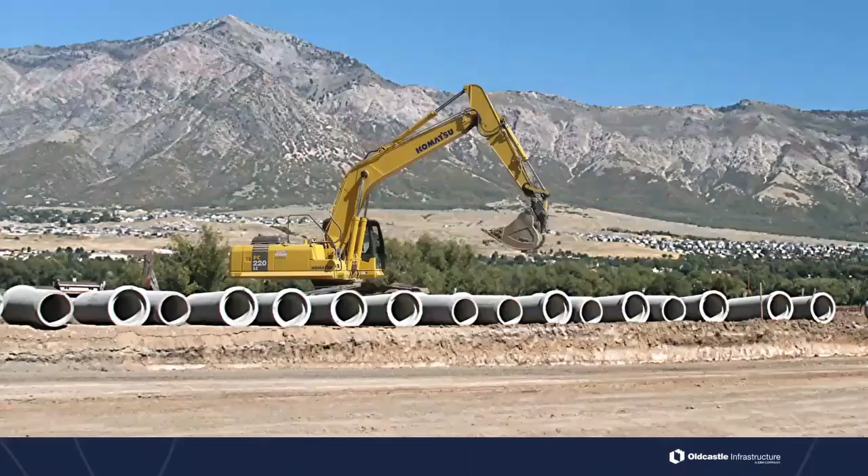Some of you may not be familiar with Oldcastle, so I'm going to quickly share some of the solutions Oldcastle Infrastructure can provide. I currently live in Utah, spending a majority of my time providing technical resources to design engineers, contractors, and inspectors in the Mountain West area. Most people know us by our precast products, mainly reinforced concrete pipe and precast box culverts, and we also provide precast manholes and catch basins.

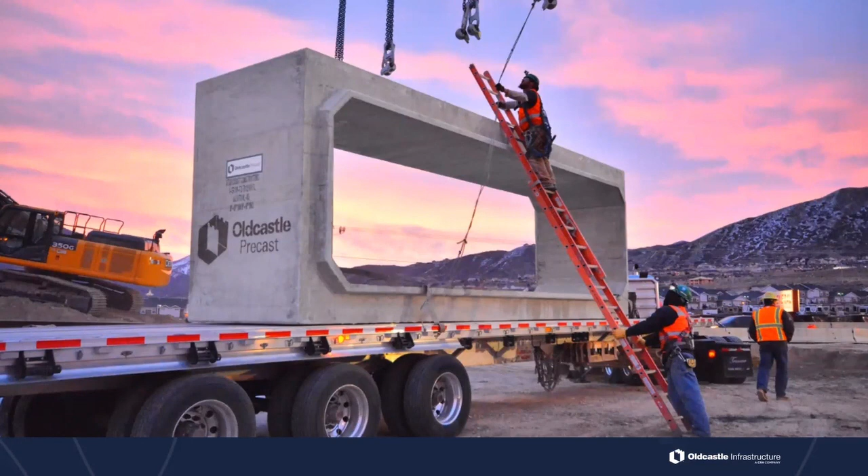This has been our main focus for many years, but recently we have added some really cool new product lines that can help meet your needs. Oldcastle recently acquired Torrent Resources, a company out of California, and the industry leader in drywell manufacturing and installation.

We've also expanded our stormwater solutions to include StormCapture, a total stormwater management system that uses precast sections for underground detention storage. This system uses the strength of reinforced concrete to provide more volume for storage, which drastically reduces the footprint compared to other underground detention systems you may have seen on the market.

We have also included some really cool stormwater treatment system options like sediment traps and hydrodynamic separators that could fit your specific low impact development needs and your stormwater treatment requirements.

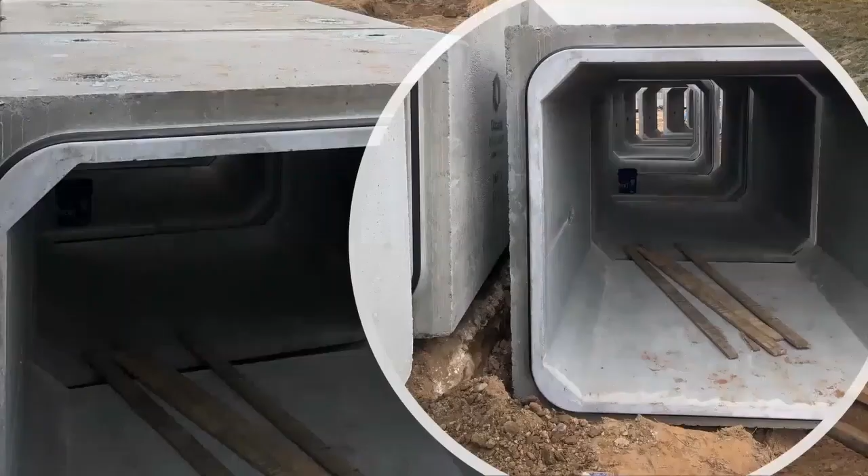Our newest addition in the Utah market is gasketed box culvert. Instead of your typical soil tight or silt tight mastic joints, we now have the ability to manufacture gasketed box culverts to provide a watertight or leak resistant joint without any additional joint treatment, which saves time and money on installation. A very cool new product that I suggest you look at.

In a previous webinar, we discussed the basics of post-installation inspection, or PII. Today we're going to dive a little bit deeper into that with inspection and evaluation of reinforced concrete pipe after installation. So let's jump right in.

Concrete cracks, fact. One of the questions I get asked most by inspectors and municipal engineers is what cracks are acceptable? They'd say, Jason, we know that concrete cracks, we understand that, but how big of a crack is okay? What can we tell this contractor is okay and what needs to be fixed?

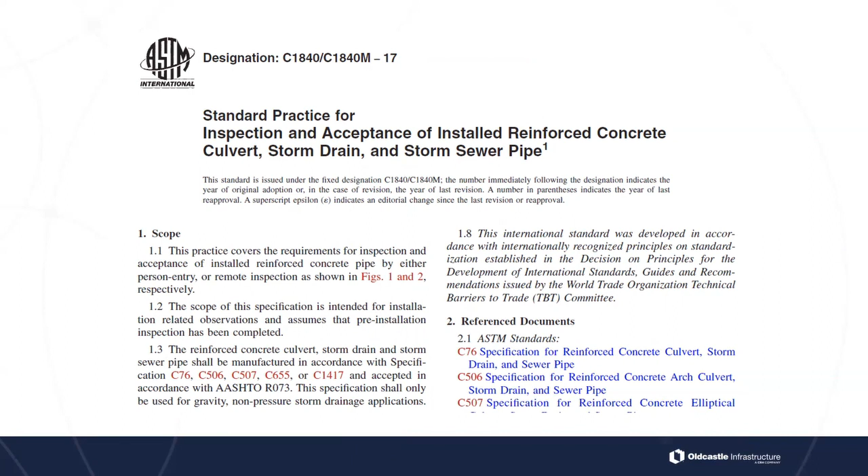About 7 years ago, I was invited to sit on a committee that wrote a national ASTM specification called C1840 that covered the guidelines for the inspection and evaluation of RCP after it was already installed. This specification was adopted in late 2017, and it has become an absolute game changer in the reinforced concrete pipe industry. After decades of relying on guidelines and recommendations from industry professionals like myself, we finally had a codified specification with objective and measurable criteria for the acceptance or rejection of reinforced concrete pipe.

So the sections of ASTM C1840 are as follows. Section 1 goes over the scope of the spec. Section 2 goes over all the reference documents, whether ASTM specs or AASHTO, different guidelines there. Section 3 is all about the terminology and the definitions. Section 4 talks about significance and use for the spec. Section 5 talks about pipe inspection equipment and the procedures. Section 6, equipment and operator accuracy verification.

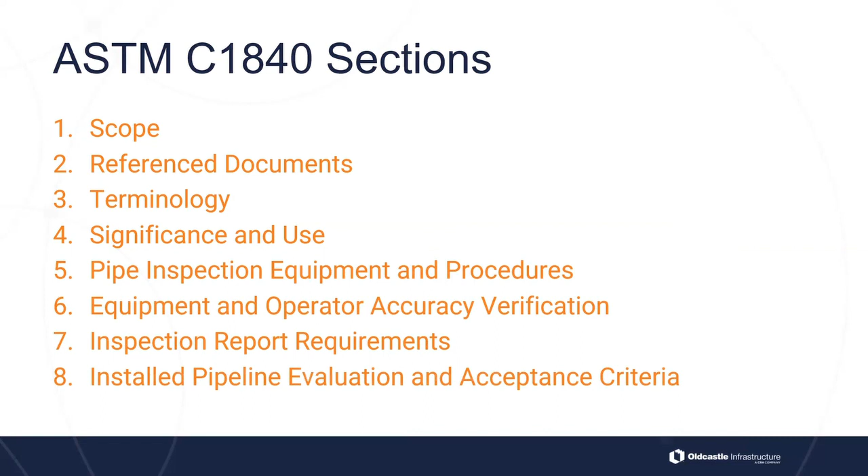Section 7 discusses the requirements for inspection reports. And Section 8, which is the one that most people focus on here, and kind of the whole crux of this spec, is the installed pipeline evaluation and acceptance criteria.

The second, and the most commonly used method in our market, is remote inspection camera or remote controlled CCTV inspection. This is used in small diameter pipes, because about 99% of the pipe that I get to inspect is too small to walk through. This is what I see more than anything.

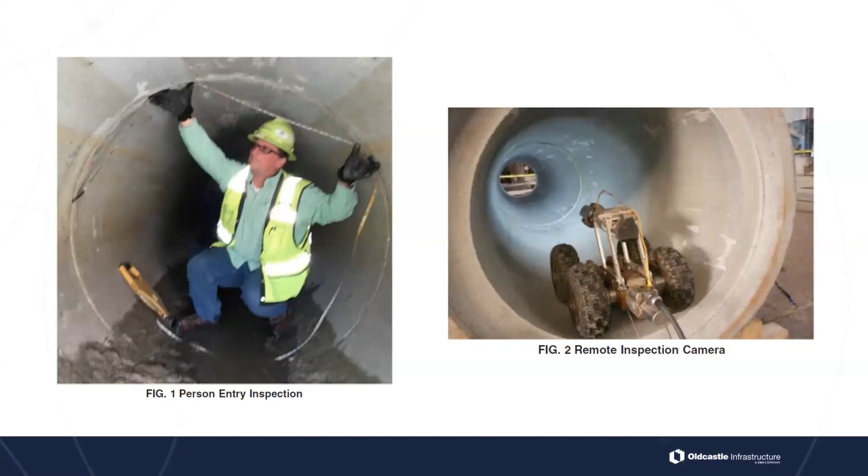So I get asked a lot, what should we be looking for in these inspections? When hiring a professional to do your video inspections of the pipe, I would suggest that you find someone that is NASSCO PACP certified. So what is the NASSCO PACP certification?

Well, I am so glad that you asked. I thought you'd never ask that question. I've been dying to tell you, so let's get into it here.

NASSCO is the National Association of Sewer Service Companies. NASSCO's mission is to set industry standards for the assessment, maintenance, and rehabilitation of underground infrastructure and to assure the continued acceptance and growth of trenchless technologies. NASSCO's vision is to increase awareness of aging underground infrastructure and provide viable solutions through education, technical resources, and industry advocacy.

NASSCO offers three separate certification programs: PACP, LACP, and MACP. PACP stands for Pipeline Assessment Certification Program, LACP stands for Lateral Assessment Certification Program, and MACP, yep, you guessed it, Manhole Assessment Certification Program.

These are the trusted sources for proper and consistent assessment condition coding of pipelines, laterals, and manholes. The goal of these programs is to help pipeline system owners create comprehensive databases to properly identify, plan, prioritize, manage, and renovate their assets based on condition evaluation.

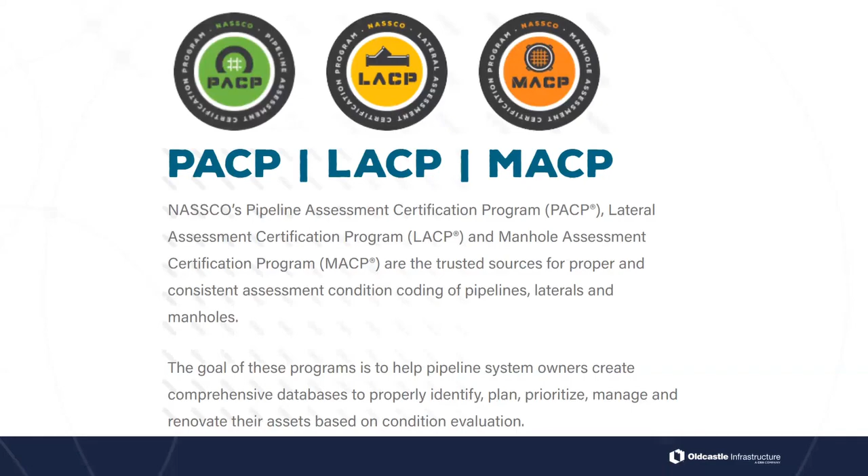So in order to better understand the inspection videos I was watching in my job, about 5 years ago I decided to sign up for a class and get my PACP certification. Interesting side note, it was in Las Vegas in August, so yeah, it was pretty miserable. It was like 120 degrees, but that's neither here nor there.

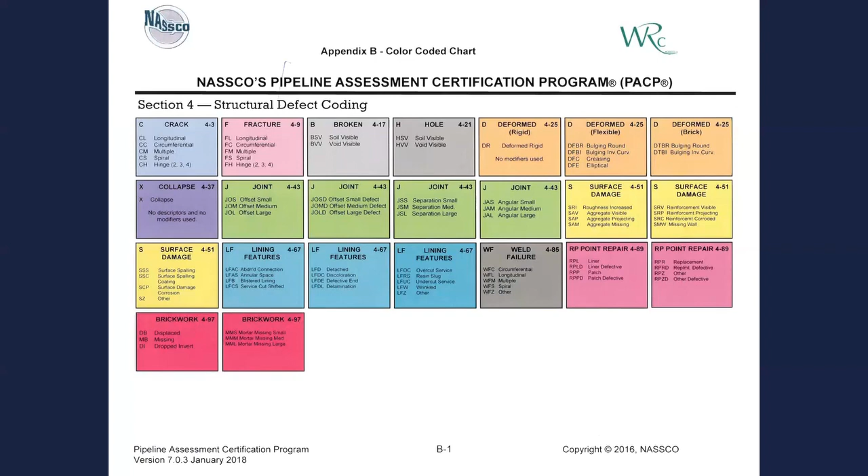Section 5 deals with codes for operation and maintenance issues, including deposits of sand and other debris. There's a whole section just for identifying roots within a pipeline. There's also the section on infiltration, obstacles and obstructions, and my personal favorite, vermin.

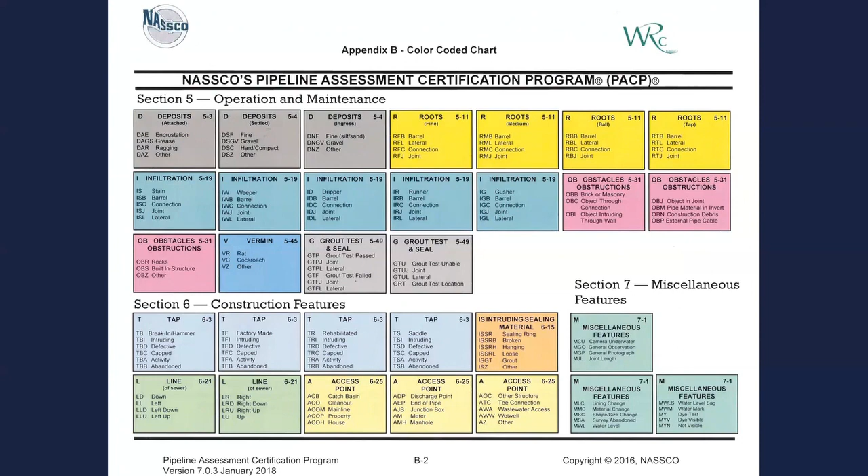Interestingly enough, I should point out that vermin, if you look, there's that blue box with the V, vermin. There's really only 3 options for coding vermin, which I thought was kind of interesting: rat, cockroach, or other. I'm not 100% sure why this intrigues me so much and why I'm so fascinated by the fact that the only vermin you can code are rat, cockroach, or other. But I don't know, it just is interesting to me.

Okay, so let's go back to section 4, like we talked about. Remember, that's about structural defects. So let's look at the 4 most common issues found in an inspection of RCP.

So the first blue box there is for a crack. The C in the top left-hand corner shows the initial code for a crack, so if you find a crack, we know it's going to be a C. The numbers in the top right-hand corner are the page number for easy reference in the manual if you have any questions or need examples of different types of cracks.

So each of those pages in that manual, there's just page after page of examples, right? It's really helpful to say, okay, what does this one look like? You can compare and contrast and find which one looks like what you're seeing, so that you can ensure you're coding it correctly.

Now, as you've done this a lot of times, and as you go through and identify these, they start becoming second nature on how you code them and identify them. So it gets easier over time, but at the beginning, you're referring back to that manual a lot. It's good that they provide a lot of visuals and detailed pictures and images, and it's all in full color, so it helps you really see what you're looking at.

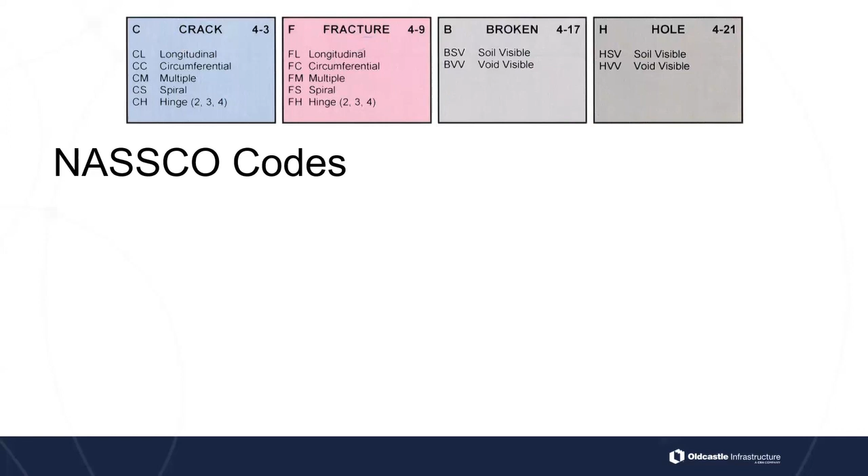So once we've identified it as a crack, there are 5 additional options to get a little bit more specific in the coding. For a crack, you've got CL for a longitudinal crack, CC for a circumferential crack, CM for multiple cracks, CS for a spiral crack, and CH for a hinge crack.

Similarly, fractures have the same 5 options for additional coding. And then you've got a broken pipe, which has the option of BSV, broken soil visible, or BVV, broken void visible. And a hole has the same options as a broken piece of pipe.

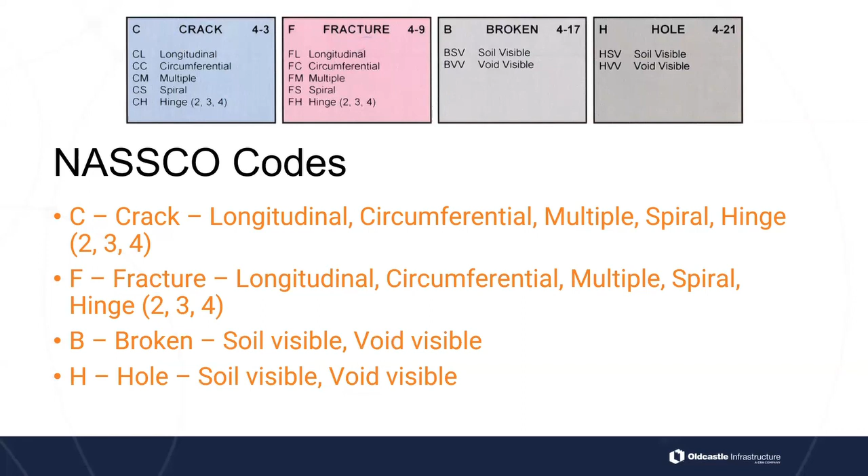Before we go any further, I think it would be good to go over the difference between a crack and a fracture as defined by NASSCO, because some people may not really know, and they may be calling cracks fractures and fractures cracks. We want to make sure we're getting those identified correctly.

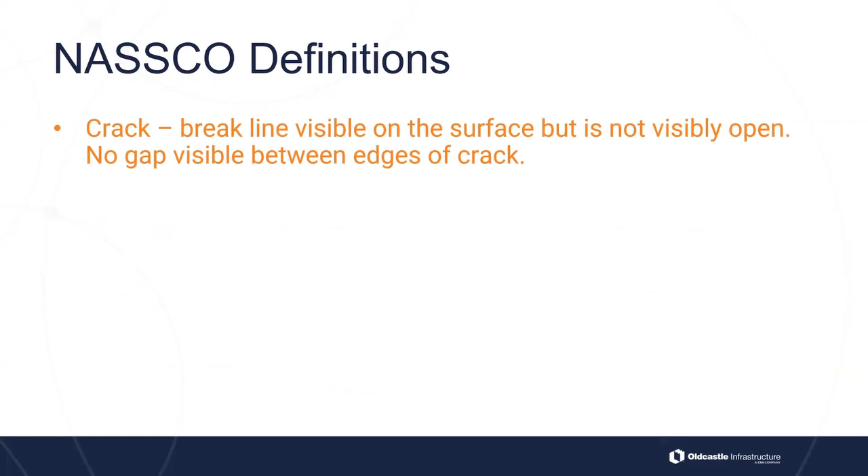So a crack is a break line visible on the surface, but is not visibly open. There's no gap visible between the edges of a crack. Now, a fracture, on the other hand, is a break line that has become visibly open and a gap can be seen. So the pipe wall in this case is still in place and doesn't move, but there is a gap, and the side of the crack can be seen.

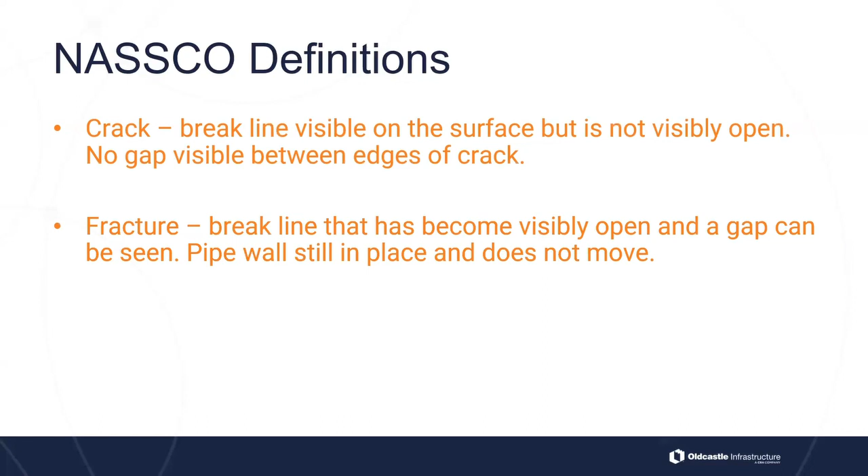Because cracks and fractures are the most common and have the most secondary classifications, we should make sure that we understand exactly what those codes mean.

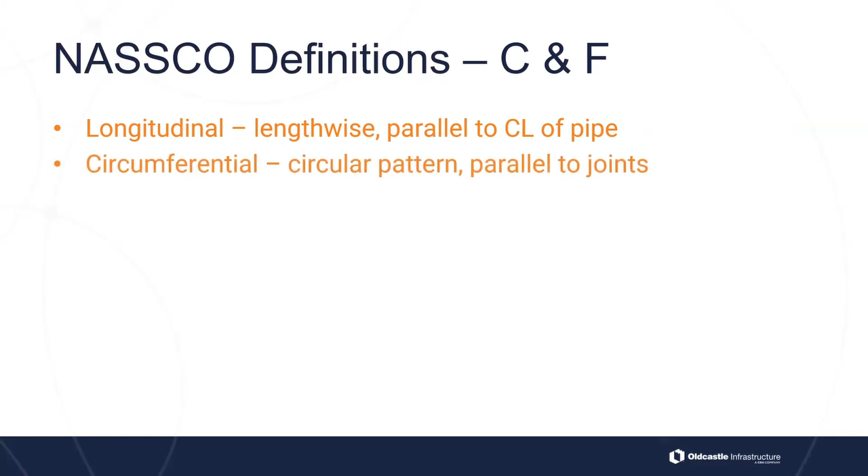So for cracks and fractures, L is longitudinal - this is lengthwise, a crack or fracture that is lengthwise and parallel to the center line of the pipe. Now, C is for circumferential - this is a circular pattern, parallel to the joints, so it goes around the inside of the pipe in a circular pattern.

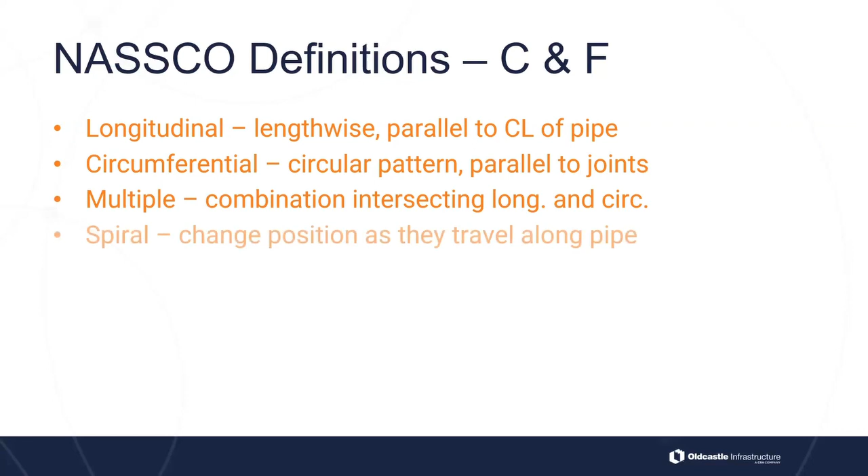M would be for multiple - this is a combination of intersecting longitudinal and circular cracks. So if there's multiple cracks all throughout that pipe section, that's what they would code as multiple. Now, spiral is one that changes position as it travels along the pipe. So if you have one that's going from longitudinal to circumferential, that would be a spiral crack.

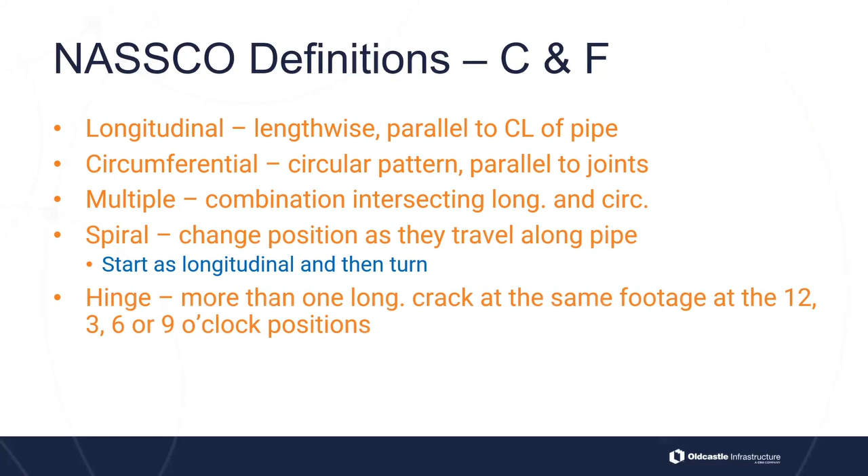A hinge crack is more than one longitudinal crack at the same footage at the 12, 3, 6, or 9 o'clock positions. So that would be - you've got a crack at top and bottom, or at the spring lines, or at all 4. That would be your hinge crack.

So going back to this, now that we know what all of those are for cracks and fractures, you could see CL, CC, CM, CS, CH, FL, FC, FM, FS, FH. For example, if you're reading through an inspection report and you see a CC, you would look at this cheat sheet and say, oh, CC means it's a circumferential crack, right?

And if you were reading through the report and you saw an FL, for example, that wouldn't stand for Florida. That would be a longitudinal fracture, and so on and so forth. So let's take a look at a couple of examples of each of these, and see what we're identifying and identify them correctly.

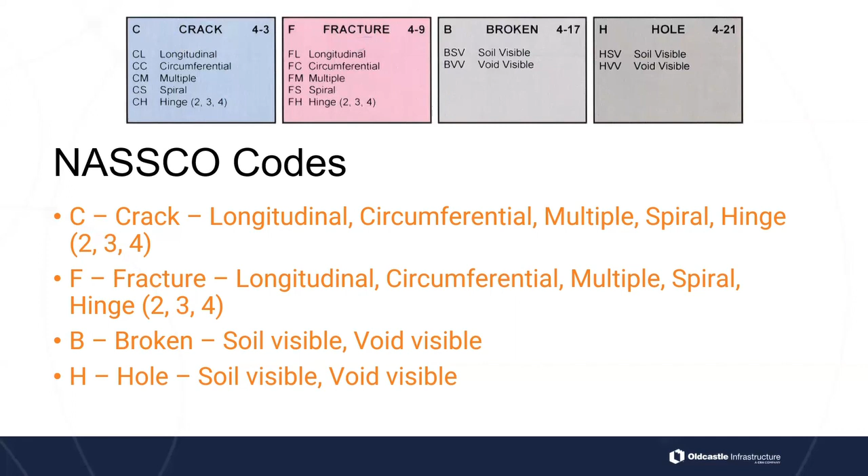Now, this one here, if you look at the top of that picture, this is kind of an interesting one. This is a brick pipe, right out of the NASSCO manual here for PACP. At the top of that pipe, you can see that it's more than a crack. It's an actual fracture. You can see the gap there. So that is a longitudinal fracture, or an FL, fracture longitudinal. That's kind of a cool picture there.

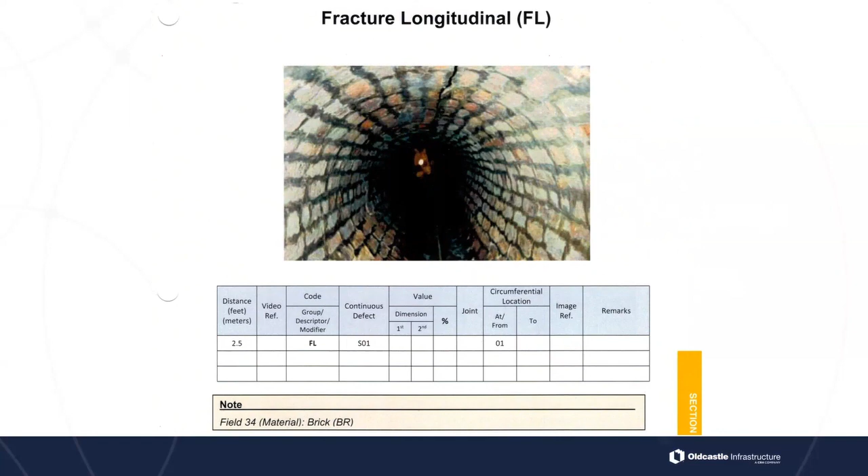This one is also out of the book in section 4 there. This is a fracture spiral. You could see that it's a gap, so we know it's a fracture. It's not just a crack, not just on the surface. We can actually see the gap, so we know it's a fracture. And notice on the right-hand side of that picture, it's coming in as a longitudinal, and then it immediately dives down into a circumferential crack. So that would be coded as a fracture spiral.

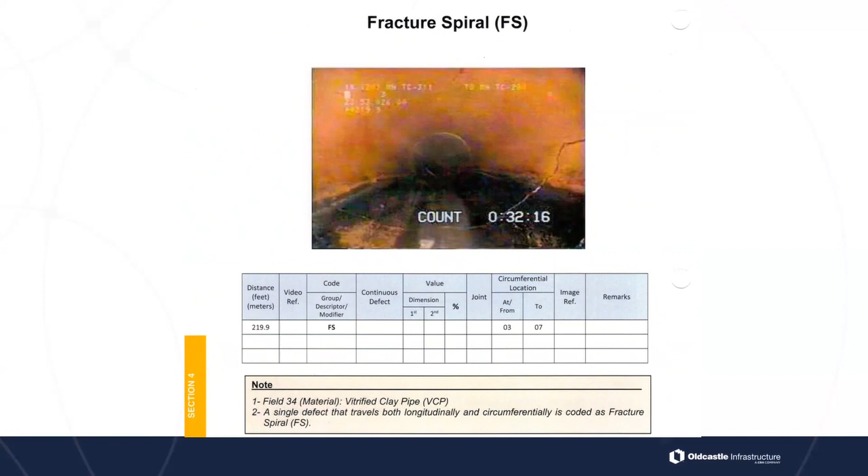And then this one would be not only crack multiple, but hinge crack. So this would be a CH, crack hinge, and then you would also put how many quadrants it's in. In this case, you could see it at the spring lines and at the top. So we've got one at 12 o'clock, one at 3 o'clock, and one at 9 o'clock. Now we can probably assume that there's one at the 6 o'clock position.

However, when we're coding these and going through and inspecting, it's not our job to assume. So we're not going to say that it's in 4 quadrants, we're not going to say CH4, because even though there's water, debris, silt and deposits along the bottom, we can't fully tell that there's a crack. If you cannot see the crack in the bottom of the pipe, don't call it out. It might be there, but it's not for us to make those assumptions. So we would just put CH3, because that's all we can see.

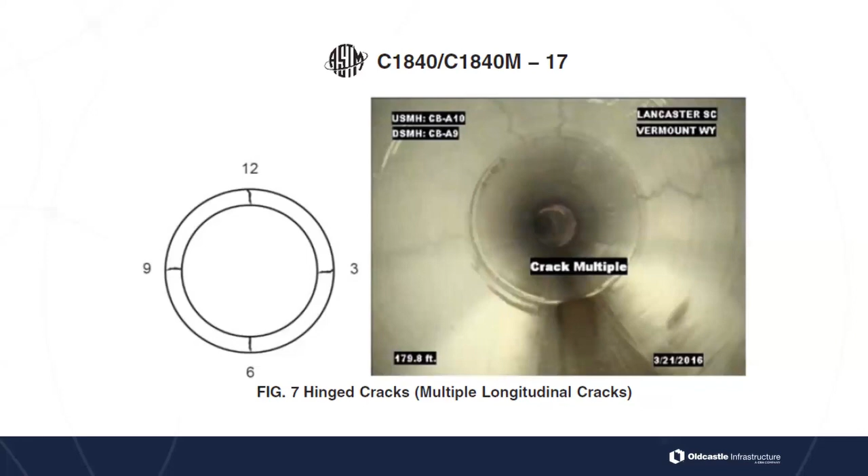All right, so that's for cracks and fractures. Now we're looking at another issue. The other most common issue would be joints, right? So you've got some coding for joints here. You've got 4 different options for joints: offset, defect, separation, and angular.

So with offset, you've got offset small, JOS, joint offset small. You've got JOM, joint offset medium, JOL, joint offset large. So the first picture there, figure 13, shows a joint offset, and they've got that coded as JOM, or joint offset medium. That would be where your joint is actually offset a little bit so that vertically, it is coming into the pipe a little bit there. Okay, so that's your offset.

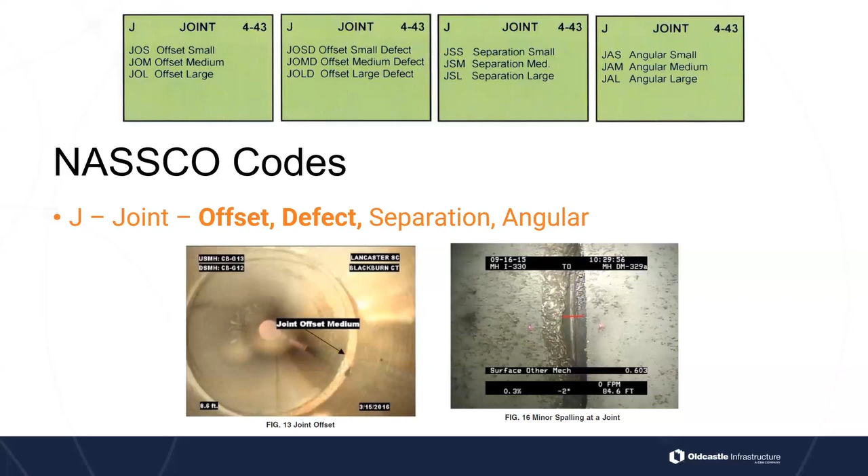The next one would be a defect. For instance, if there's minor spalling at the joint, or something like you could see in figure 16 on the right there, that would be defect. So that one could be JOSD, joint offset small defect, because there's some cracking or some breakage there at the joint, just right as it comes in there.

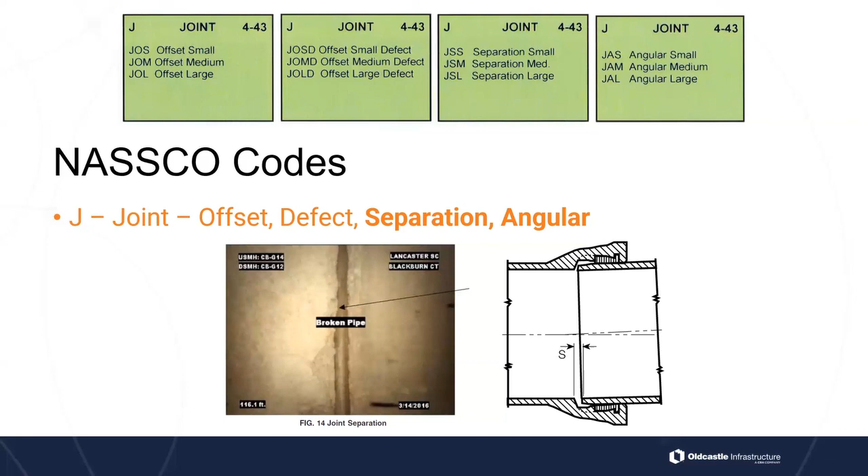So you can make that assumption, and you could say, okay, because it's coming in at an angle, whether vertically or horizontally angled, we could code that as JAS for angular small, JAL for angular large, or JAM for angular medium. That's the figure on the bottom right of your screen showing the angular joint.

We've also got codes for infiltration. This is something we see quite often. There's actually 5 different levels of infiltration according to NASSCO: stain, weeper, dripper, runner, and gusher. Within each of those, you can identify the location.

So we could say, is that at the joint, ISJ? Is it on the barrel of the pipe, ISB? Is it at a connection between two pipes? That's not very common in RCP since our connection would be at a joint or junction box, but if you've got a Y in a metal pipe or plastic sewer pipe, as it comes into a Y, that could be a connection. Or is it at the lateral? We don't see a lot of laterals in concrete pipe, but every now and then we'll see that. So you've got a stain.

The next one would be a weeper - a little tiny bit of water coming into the pipe. If there's any water at all coming in and it's really minor, we're not really seeing the water come in, but we can see the staining and that it's wet. So we know water is coming in, but we're not seeing it flow in. That would be a weeper.

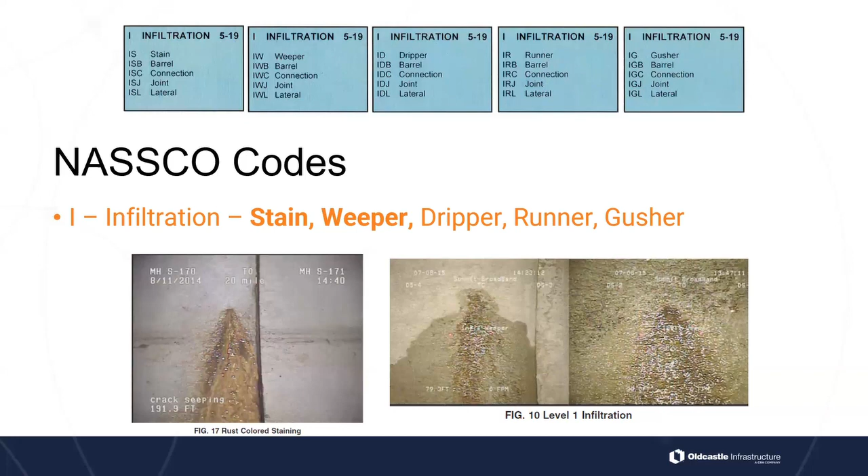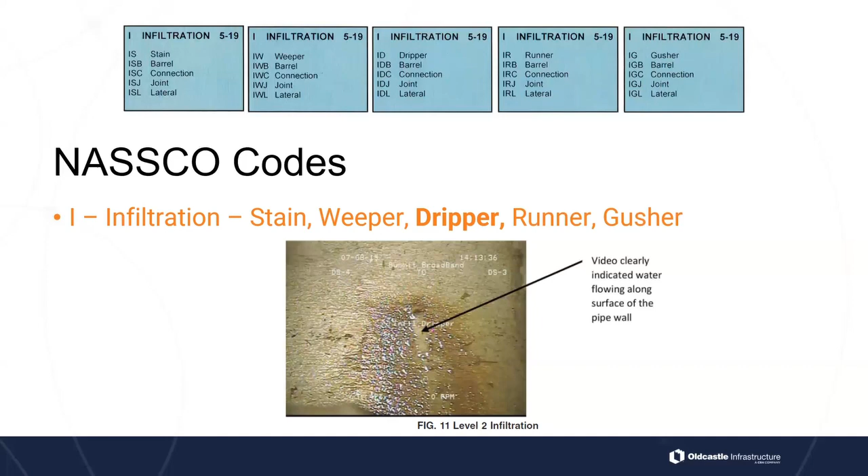The next one would be a dripper. This is one where we're actually seeing water come into the pipe, and again you'd identify where that dripper is - ID is infiltration dripper, and IDB would be within the barrel of the pipe. If you see water actually flowing into the pipe, albeit maybe at a low rate, but flowing along the surface of the pipe wall, that would be a dripper.

Now the last two would be a runner or a gusher. A runner means we're seeing water come in pretty quick, typically at the top of a pipe where it's dropping in at a high volume, or even coming in from the side and just coming in really fast - that would be a runner. A gusher is one where we actually have water under pressure, maybe high groundwater with a hole or crack in the pipe, and you're seeing water actually spray into the pipe. That's what NASSCO would consider a gusher.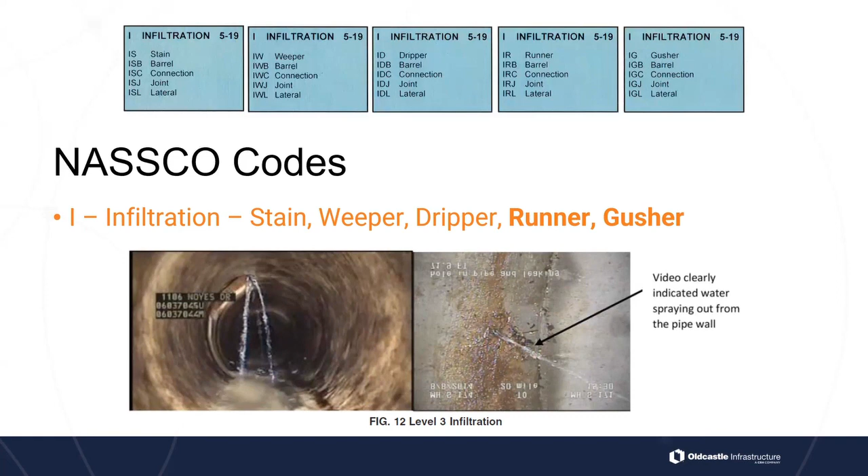These CCTV inspections are extremely helpful in identifying issues within our pipelines. And I need to point out that not all inspections are created equal, and there are some things we should be watching out for.

For example, we need to make sure the camera is centered within the pipe. If it's not in the center, and let's say it's too low, as you go around the circumference of the pipe, things at the bottom may look really big. Any issues or defects at the bottom may look much bigger than they really are, and issues at the top may not look as severe, because of the way these cameras work with fisheye lenses and the distortion there. If it's not perfectly centered, you'll have issues as you go around the pipe.

We also want to make sure the camera is moving slow enough to see issues.

I've seen a handful of videos where the cameras just fly right through, and you can't really identify any issues because it's going too fast. Now, NASSCO recommends a maximum speed of 30 feet per minute.

Another thing you want to make sure of is that your operator is stopping to document any cracks or damage or other issues within the pipe. If there's any obstructions, roots, or anything coming into the pipe, the operator really needs to stop and document those.

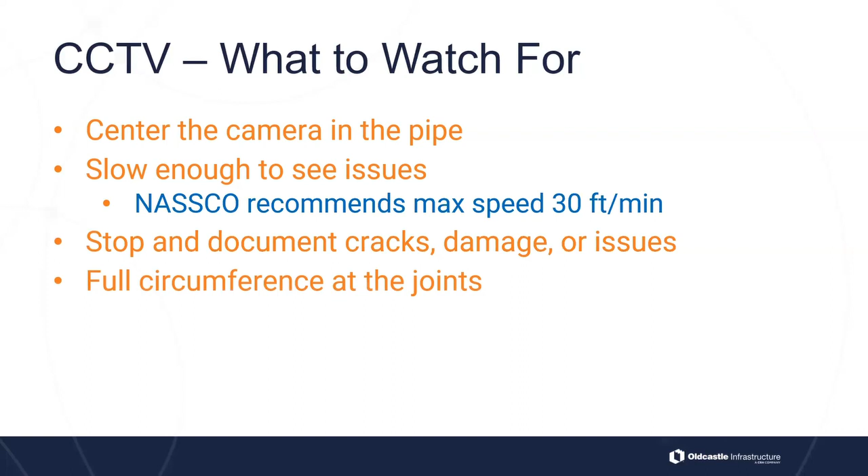Another thing I always recommend, I like to see the full circumference at every single joint. So as they go 8 feet in a concrete pipe, stop. The camera pans over, looks at the joint, goes all the way around the full 360 degrees to make sure there's no issues there, no exposed gaskets, joint gaps that are too big, joint separation that's too much, or any offsets. Those are the things I'm looking for, so we want to make sure our operator is going around the full circumference at each of the joints.

Another thing to watch out for is any zooming in and out. When we zoom in on some of these pipes, some of the issues can look a lot worse than they really are. I'll go over this more when we get into the inspection report part, but zooming in can be a real problem. You've got to watch these videos in context to ensure they haven't zoomed way in so the crack looks bigger than it is, or the joint gap looks bigger than it really is.

Another thing I notice a lot is the coding, how they're coding them. Sometimes they'll call something a crack when it really should be a fracture. Sometimes it's the severity and just the nomenclature they're using. I always ask to make sure they're NASSCO PACP certified. I've seen some cracks where they'll say big crack or large crack, but that's not the correct coding. What one person considers large may not be large to another person. Those things can really raise red flags in the inspection reports.

As city engineers who maybe don't look at these videos as often as other people in the industry are reading through it, they're like, oh my gosh, it's a large joint gap, or large crack, or really big cracking, or whatever they're calling it. That could be problematic as we go through it and look at it.

Another thing to really be concerned about is images versus video. Sometimes someone will just take a screenshot of the video and send it to me and say, is this okay? Is this acceptable? Is there anything wrong with this? I really can't get the full idea of what's going on unless I watch it in context with the video. So I typically won't review images and write a letter based on an image, because I need to see it in its entirety. I need to see what's going on, what's causing this, and identify the underlying cause of the issue.

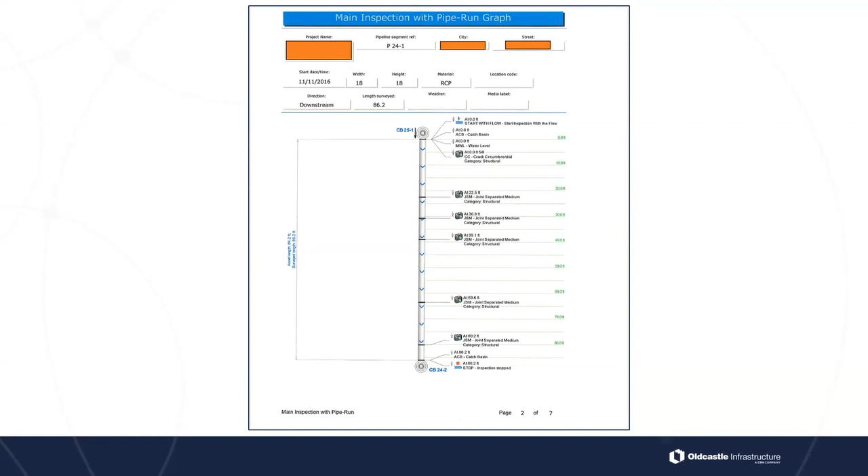And it goes through and identifies each of the issues that they found at each of these locations along the pipe run. And as you go to the next page, it actually shows you any of the observations that they saw with pictures. And that's what I always like to see, the screenshot, so that I can see the picture that they're seeing.

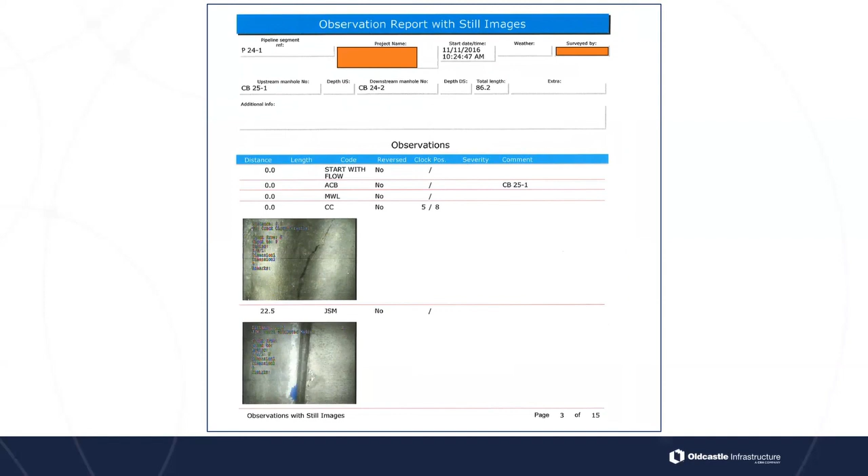So we're going to actually take these two issues here. We're going to zoom in a little bit here. And this is what we're looking at.

Notice the first number there, 0.0. That's it, that's the start point. So that's how far along they are on the pipe. This is right at the beginning where it's connected to the catch basin there. And then the coding is CC, and that would be a circumferential crack, we know, right?

The other pertinent information on this is at the very end where it says 5 to 8. That's just the location, it just says where the location of the crack is in relation to that. So that's one thing to keep in mind.

But then when you go to the next one, you've got 22.5. So that means that at a distance of 22.5 from where they started, they found an issue with a joint, right? JSM - we know J is joint, S is separation, and M would be medium. So joint, separation, medium - now that's how they identified it.

And when I look at that picture, I think, well, again, I can't really tell from a picture. I want to see the video so I can see, are they zoomed in? What if they're zoomed way in? To me, honestly, that circumferential crack up there looks like they're zoomed way, way in, just based on the size of the aggregate as it's showing up in the picture. It looks like they've actually zoomed in.

So I want to see this. Did they zoom in to get this really good picture so it looks bigger or worse than it really is? I don't know, so I want to see the video.

And what I'm looking for when I look at the videos here, I'm going to give you an example. So this is a picture of a video that I took. And the reason I like this is because it's got a little crack there. And if I zoomed way in, that crack would look really big.

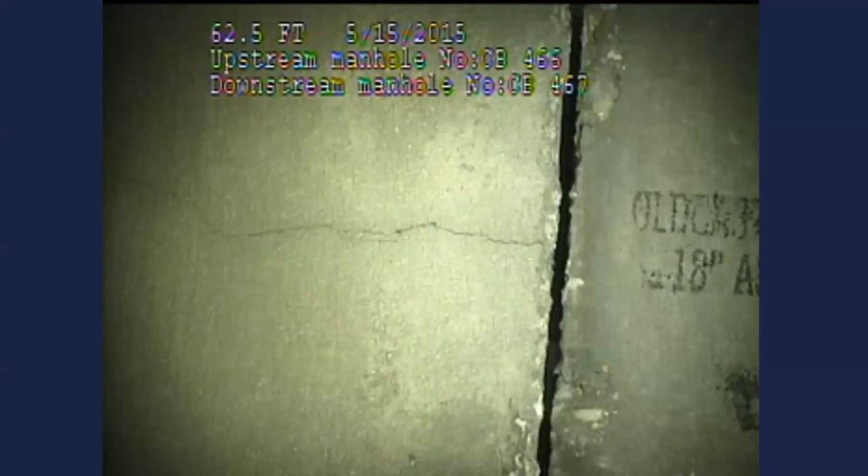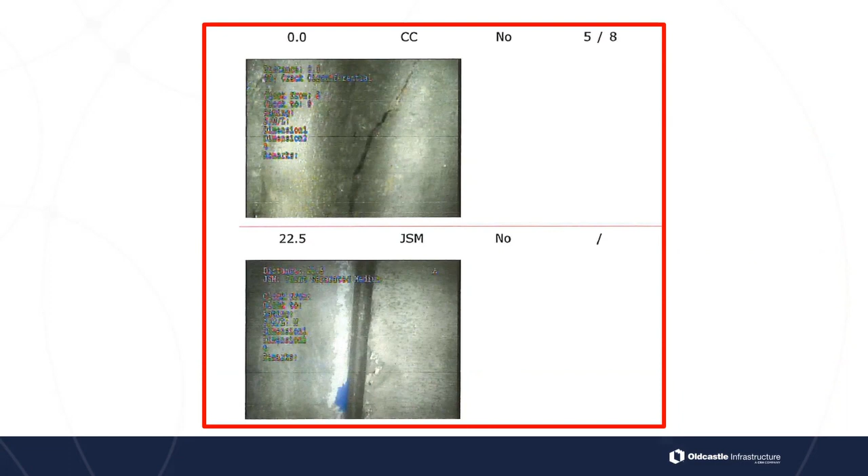Okay, so again, going back to there, now that we've seen it in context, I can say, all right, well, I need to go to this pipe run, and I need to go to the video, and I need to look at that joint gap, so I can know if it really is as bad as they say it is.

Okay, so there's a handful of similarities and a few differences in the nomenclature and naming between NASSCO and ASTM C1840. So I'll go through a few of them for you here.

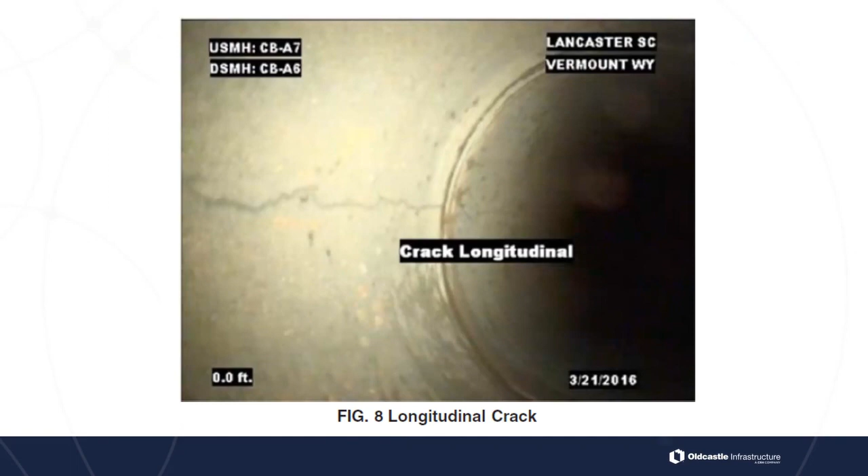Longitudinal cracks, a CL crack longitudinal, that's the same in both. NASSCO and ASTM both call it a longitudinal crack. Same with circumferential cracks, those are the same, right? Hinge cracks, similar, right? They call them hinge cracks, in the different quadrants. Typically, you're going to see those at 3, 6, 9, and 12, but that's it.

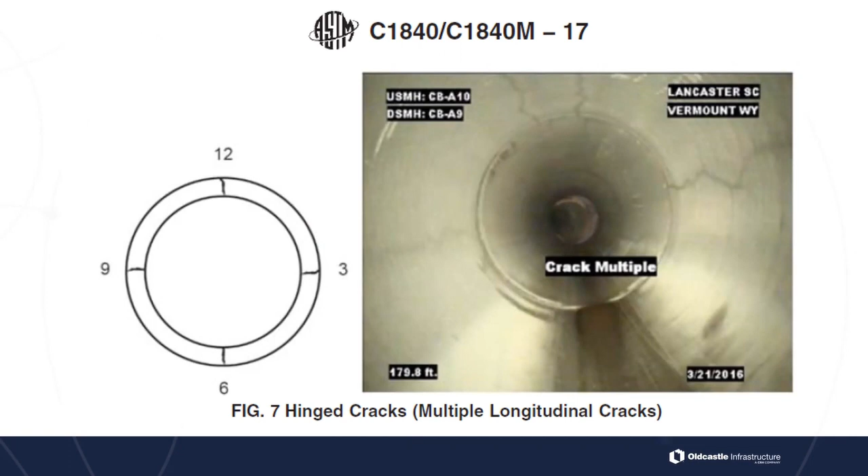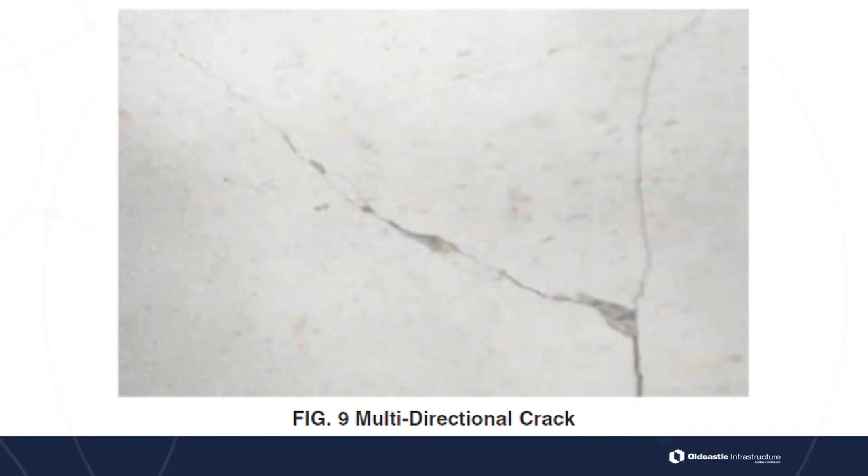As far as infiltration is concerned, I mentioned there were 5 different infiltration things with NASSCO. You had the stain, the weeper, the dripper, the runner, and the gusher. With ASTM C1840, they've broken it down into 3 different levels of infiltration. So level 1 infiltration is your stain and your weeper. If you can't really see the water flowing and coming in, but we know there's water coming in because it's wet and you could see the stains, then we would call that a level 1 infiltration.

With level 2 infiltration, this is where you can see in the video that water is clearly flowing in. You can actually see the water coming in. And so that would be similar to your dripper in your NASSCO certification. So a dripper is the same as your level 2 infiltration in ASTM C1840.

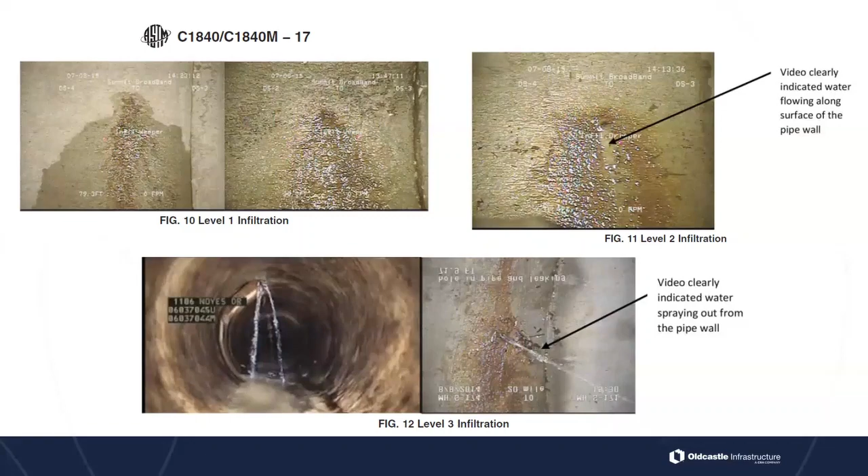Then we've got our level 3. This is water spraying in and running in. So these would be your level 3 infiltration, the same as your runner or your gusher. So if water's forcefully spraying in and pushing through that hole or through the crack or through the joint, that would be your level 3 infiltration. So this is one thing that I really love about ASTM C1840.

Here are a few other things that it talks about in there, with some pictures. Most of the specifications in ASTM, interestingly enough, are all in black and white. They've got maybe figures and diagrams drawn, but ASTM C1840 is in full color. So it has all of these different pictures in full color that you can use to help you identify things and issues. It's kind of a cool and unique spec because it's really one of the only ones I've read through and seen that actually has full color photos in it.

Kind of awesome. But they have the similarities with the offsets, joint offsets, as you can see in figure 13, figure 14, same thing, joint separation. So ASTM has the same nomenclature as NASSCO. Figure 15 shows you some slabbing, spalling at the joint, staining, different things. So it's really cool with all the different pictures and figures and images it shows in this spec. It makes it a really unique and interesting spec.

When we were writing this spec, we kind of went back and forth on, do we just describe everything, or how do we do this without using pictures? And it ultimately came back that there's really no way to have a spec like this without having pictures in it to show you what we're talking about. So we could try to use words to describe this as much as we can, but at the end of the day, a picture's worth 1,000 words. This is a much easier way to write this. I can't even imagine how long this spec would have to be if we went through and really detailed what each of these things were in just written form.

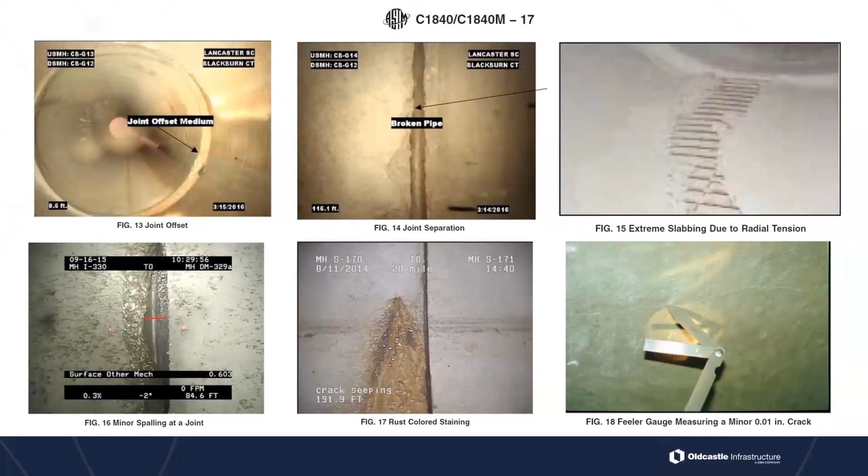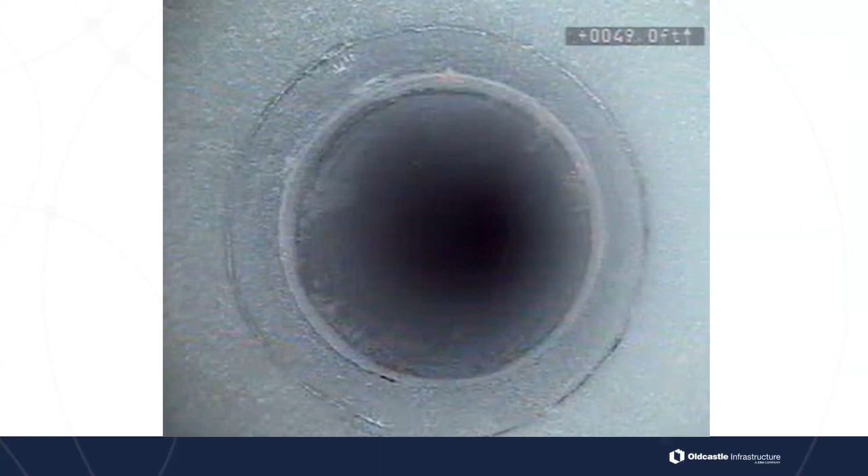We call this autogenous healing in the cement and concrete industry. ASTM C1840 calls it calcium carbonate filled pipe. A little bit different wording and naming convention than what I'm used to, but that's what we decided to call it in ASTM C1840. Instead of saying autogenous healing, which not everybody knows what it is, we decided to go a little bit more specific on what it is, and that is calcium carbonate filled pipe or calcium carbonate filled crack.

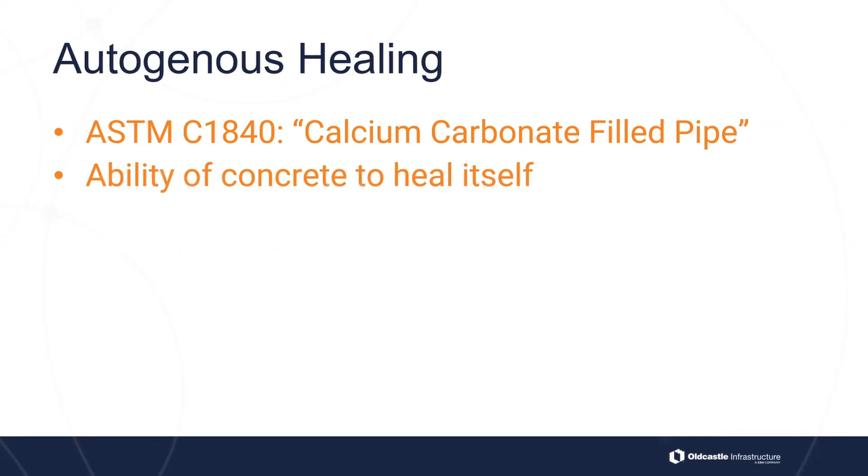Autogenous healing, or calcium carbonate filled pipe, is the ability of concrete to heal itself in the presence of moisture. What it does is it actually seals the cracks and creates this white effervescent material. So let's talk about the science behind autogenous healing.

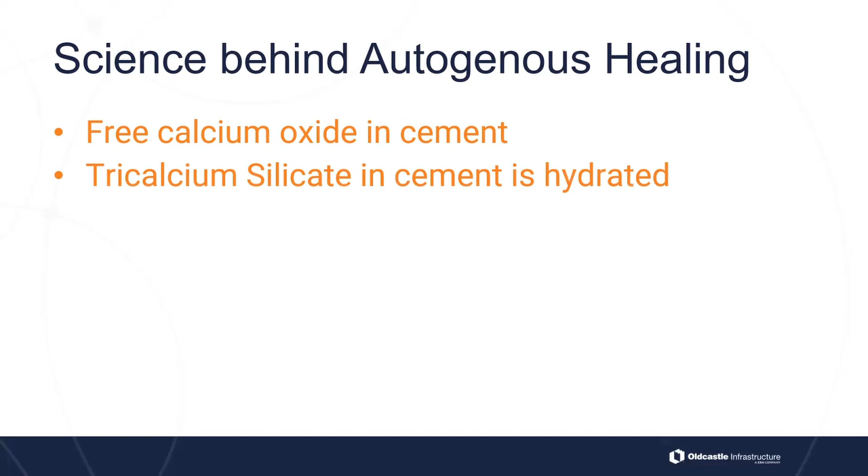Within the cement in our mix, there's always some free calcium oxide. As the tricalcium silicate in cement is hydrated by the moisture within the pipe, the calcium hydroxide is liberated. We also know that there's an abundance of carbon dioxide all around the pipe, whether it's in the air, the soil, or the water. And this CO2 is absorbed by the concrete itself.

The CO2 actually carbonates the calcium oxide and calcium hydroxide, and this process creates calcium carbonate crystals, or basically limestone, which then seals in that crack. So that's the science behind autogenous healing, and that's how it's done. Kind of a cool little process there.

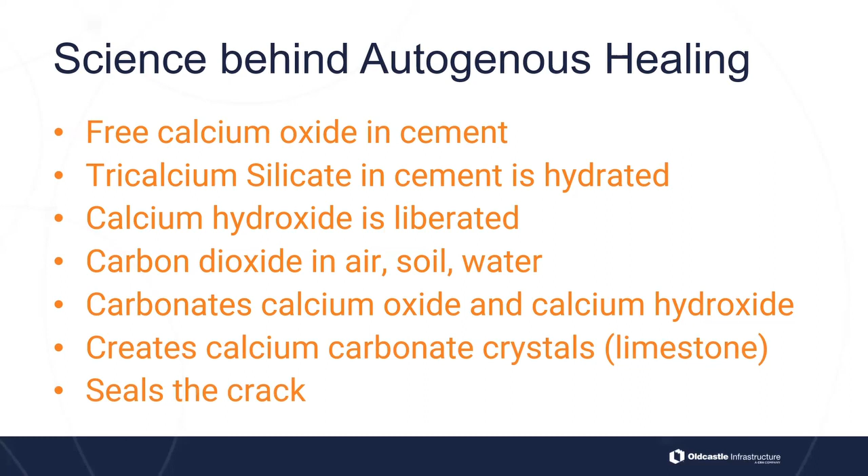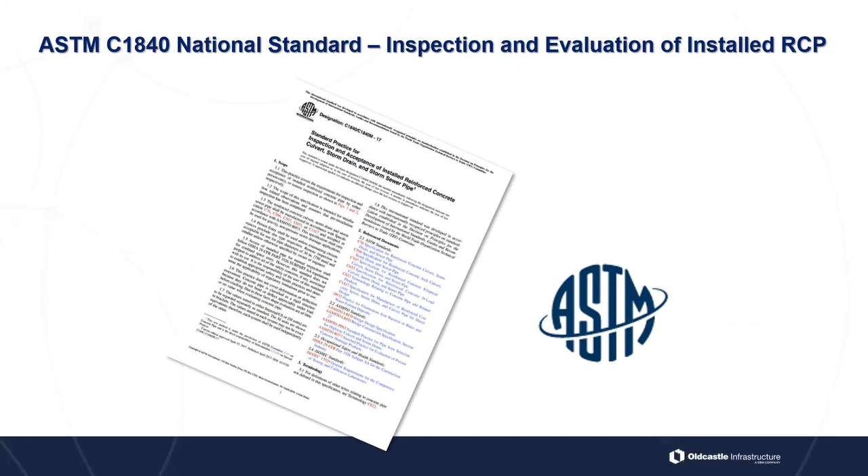Now we've discussed the differences, the definitions, and the evaluation procedures within ASTM C1840. So let's get down to the nitty gritty and what everybody really came for: Section 8. This is why we're here, this is what people really want to know. This is all about the evaluation and acceptance criteria in installed pipelines. In other words, this is the answer to that original question I proposed: what cracks are acceptable?

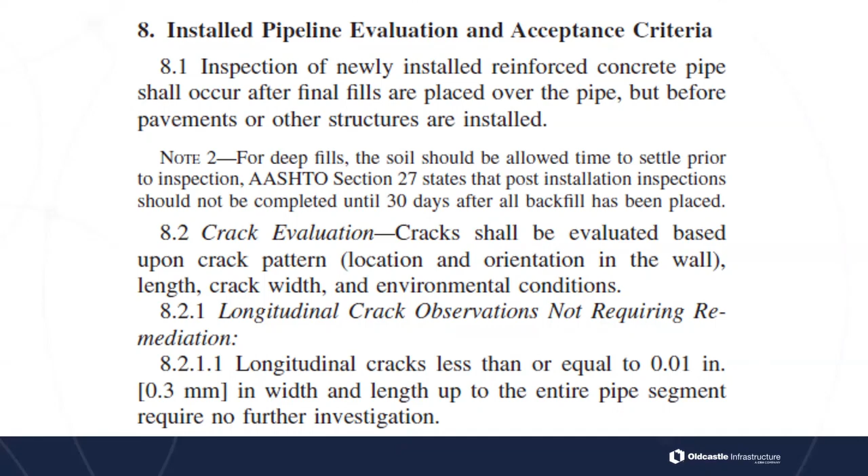Rather than just throwing the spec up on the screen and reading through it, I'm going to give you a quick summary of what is acceptable according to ASTM C1840. I'm really going to focus on the two most common issues here, and that would be cracks and joints.

First, we're going to talk about cracks not requiring any additional evaluation or remediation. According to ASTM C1840, these are the cracks that are acceptable and don't require any additional evaluation or remediation. First of all, we have any longitudinal cracks that are less than 1/100 of an inch wide - these are your hairline cracks. These are acceptable not only per ASTM C1840, but also per ASTM C76, our manufacturing specification.

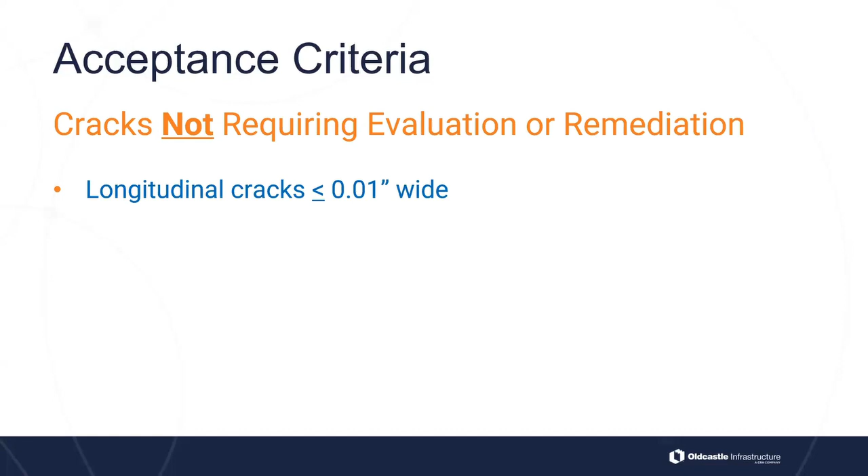Next up, we've got longitudinal cracks that are less than or equal to 5/100 of an inch wide. If you remember from previous presentations, 5/100 of an inch is the width of a dime. So if it's less than or equal to the width of a dime, and it's up to the entire pipe segment in length - so it can go from one end of the pipe to the next along the barrel of the pipe - and it's less than or equal to 5/100 of an inch, or the width of a dime, and it's in a non-corrosive environment...

According to AASHTO, I believe section 27 says that a non-corrosive environment is one that has a pH between 5.5 and 10. So as long as the pH of the soil, the water, and the material in the pipe is between 5.5 and 10, then any longitudinal cracks less than or equal to 5/100 of an inch wide are acceptable.

Additionally, circumferential cracks less than or equal to 1/10 of an inch in width, including the full circumference of the pipe, so all the way around the pipe, those are also acceptable. They don't require any evaluation or remediation.

Some people will look at that and say, wow, that 1/10 of an inch, almost double a circumferential crack, is acceptable versus a longitudinal crack? Well, the reason is that a circumferential crack is not a structural crack. Our structural steel doesn't run in the direction of the circumferential crack, so we can have a circumferential crack. It's no different than having an extra joint.

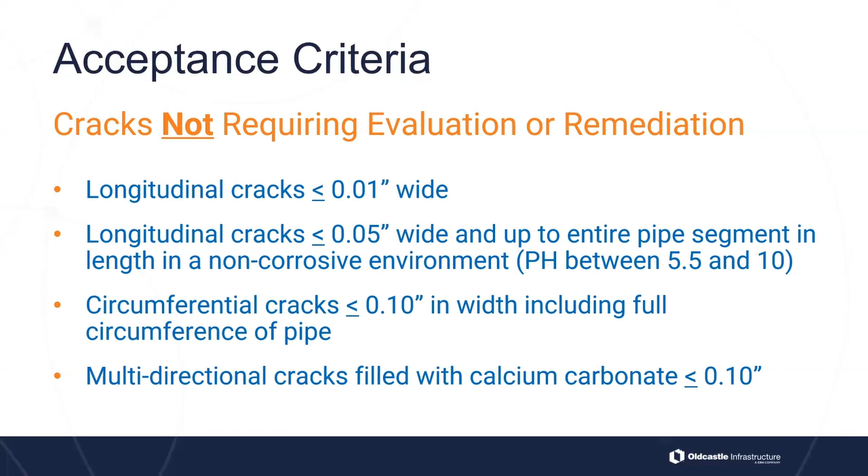This is the standard industry practice, written by industry professionals and by a lot of engineers who put a lot of time and effort into studying and researching it, using empirical data and different things to show that this is acceptable. So this is a great reference for engineers looking for guidance on what to accept in their cities or on different projects. All right, now we're going to take it one step further.

So those were the cracks that were acceptable. Now let's look at any cracks that require engineering evaluation. This doesn't necessarily mean that they couldn't be accepted. If an engineer evaluates each of these situations and finds out it's okay, I write letters all the time based on some of these I've gone through and done an additional evaluation. And luckily, I don't see a lot of really bad installations and major issues that often.

We have a lot of great contractors that do really good work installing these. But if these are some situations, according to ASTM C1840, that would require an engineer to evaluate it and determine if it requires any remediation.

I want to point out that ASTM C1840 is a specification that identifies the acceptance criteria and what needs to be evaluated and remediated. It does not give any means and methods on how to remediate or repair these issues. The reason is that this is not only a national, but an international spec used in a lot of different countries and regions.

What we may be doing in Utah and Idaho may not be what they're doing in New York and New Jersey. Some of the methods that work really well here may not even be used in, say, Texas or Iowa. So they don't want to dictate the means and methods, but they will identify which situations an engineer needs to evaluate, and then that engineer can provide recommendations or remediation ideas, or leave it up to the contractor to figure out how to fix it. He can just say, these are the issues I've identified that need to be fixed.

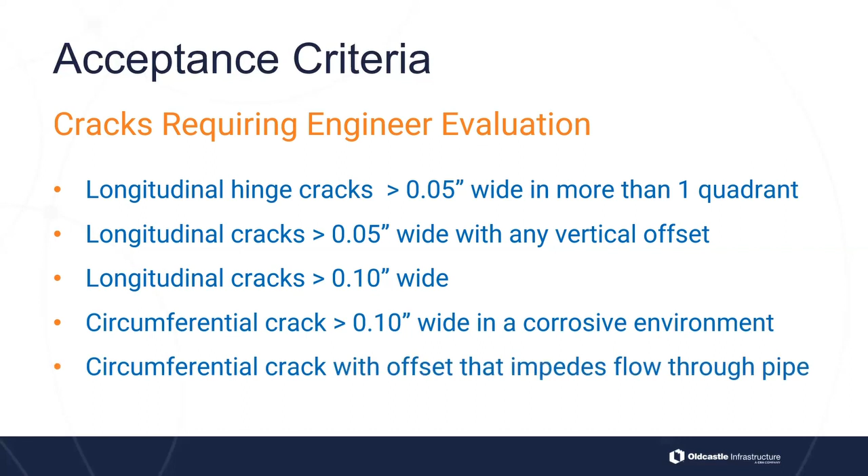Any circumferential crack greater than 1/10 of an inch wide in a corrosive environment also needs to be evaluated. And a circumferential crack with an offset that impedes flow through the pipe should also be evaluated by an engineer. All right, so now let's look at joints.

There are two different types of joints addressed in ASTM C1840, and the first is soil and silt-tight joints. These are joints meant to keep soil out of your pipe, not necessarily watertight or leak-resistant. We'll get to those in a second.

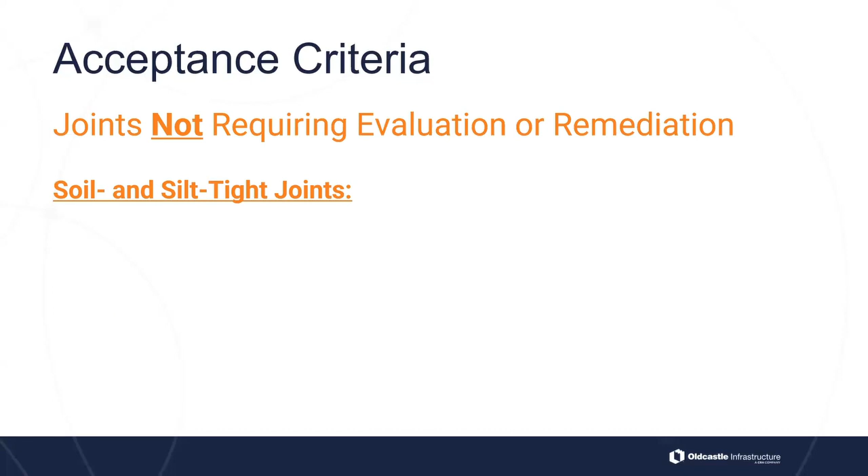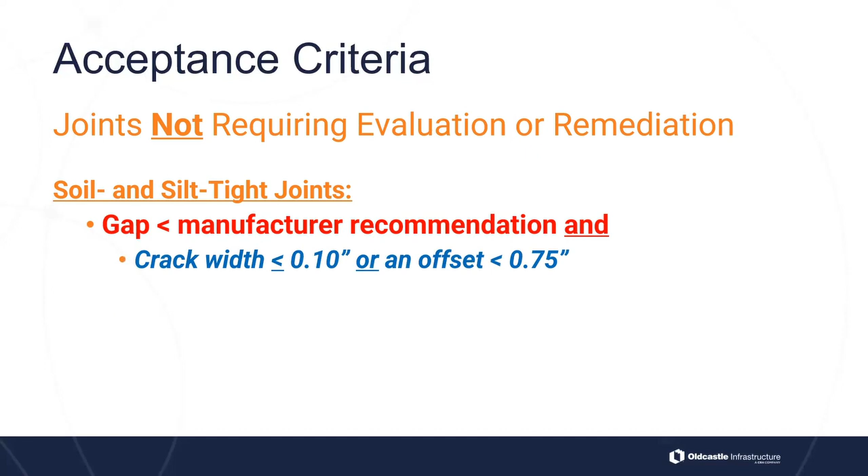For joints that are acceptable and do not require additional evaluation or remediation, they have to meet the following: the joint separation or gap is less than the manufacturer's recommendation, and if there's a crack width, it has to be less than or equal to 1/10 of an inch, or have an offset of less than 3/4 of an inch. It also has to allow entry of backfill particles less than the number 200 sieve. Since it's a soil and silt tight joint, it can let a little bit of particles in, but they cannot be any greater than the number 200 sieve. If it has any chips or spalls, those are acceptable as long as there's no steel exposed.

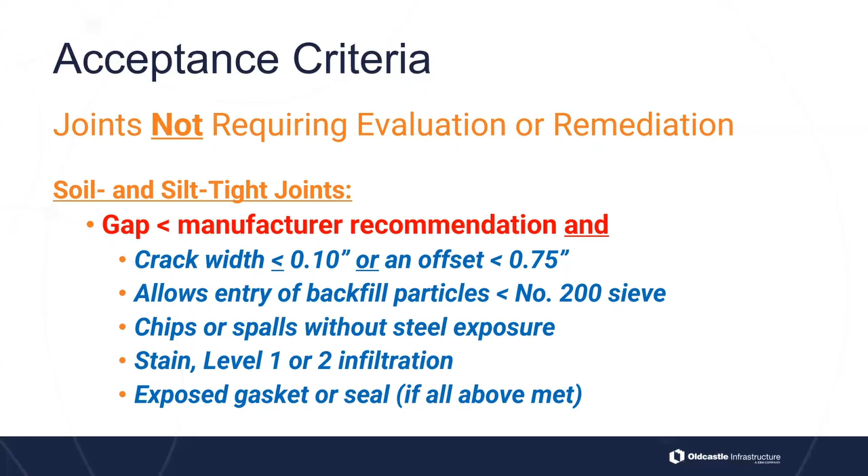If there's either a stain, or a level 1 or level 2 infiltration, that is acceptable. Now lastly, if there is an exposed gasket or seal, that is fine, because remember, it's a soil or silt tight joint. Any exposed gasket or seal is okay as long as all of the other criteria we just talked about are met. So again, these are joints not requiring evaluation or remediation.

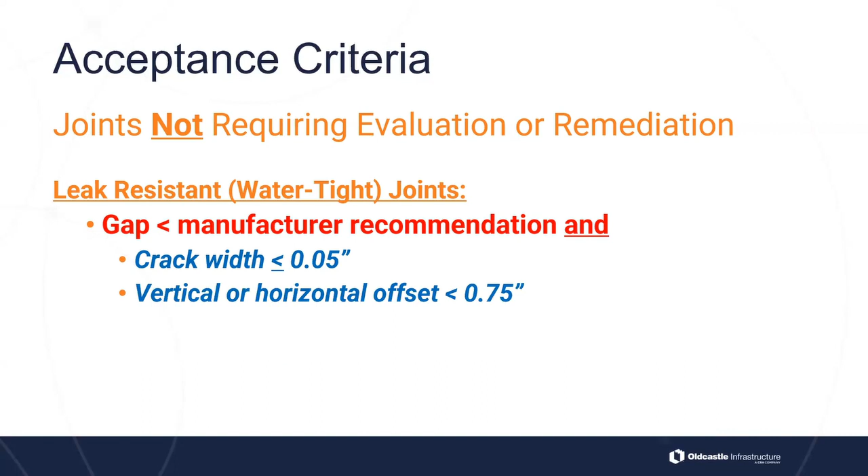Now let's look at leak-resistant or watertight joints. Again, the gap must be less than the manufacturer recommendation, and they have to meet the following criteria as well: a crack width less than 5/100ths of an inch, a vertical or horizontal offset of the joint less than 3/4 of an inch or 0.75 inches, and any chips or spalls cannot have any exposed gaskets, seals, or steel. If it meets all of those criteria, then that is acceptable and does not require any evaluation or remediation.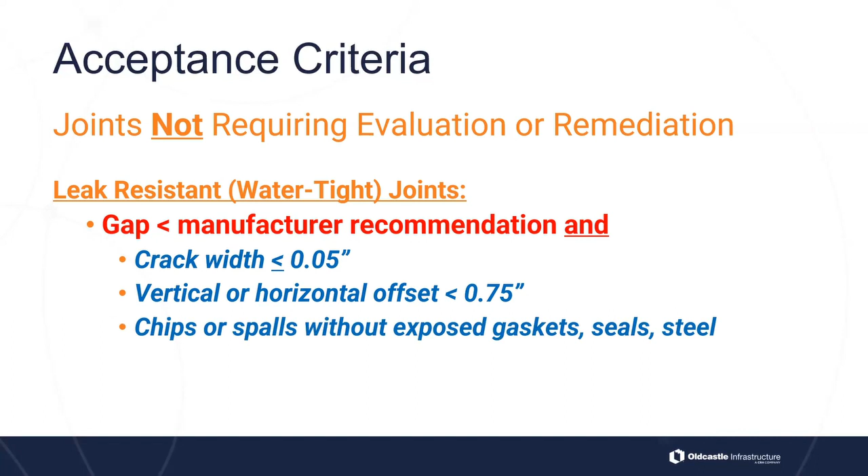Now let's look at joints that require an engineer's evaluation. I want to point out that this doesn't necessarily mean remediation would be required—that's up to the engineer to decide the means and methods and whether remediation is needed. So for soil and silt tight joints: number one, if the gap is greater than the manufacturer recommendation, it needs to be evaluated by an engineer. If there are cracks in the joint sealing surface, like in the bell or spigot, with a width greater than 1/10 of an inch, that also needs to be evaluated by an engineer.

If there's joints with a vertical or horizontal variation or offset of greater than 3/4 of an inch, make sure that engineer is evaluating it. If there's any joints in the soil and silt tight joints that are allowing a level 3 infiltration - remember, that's like your runner or your gusher. If it's really flowing in there really big, that one you've got to have evaluated by an engineer. Something's going on there that we've got to look at.

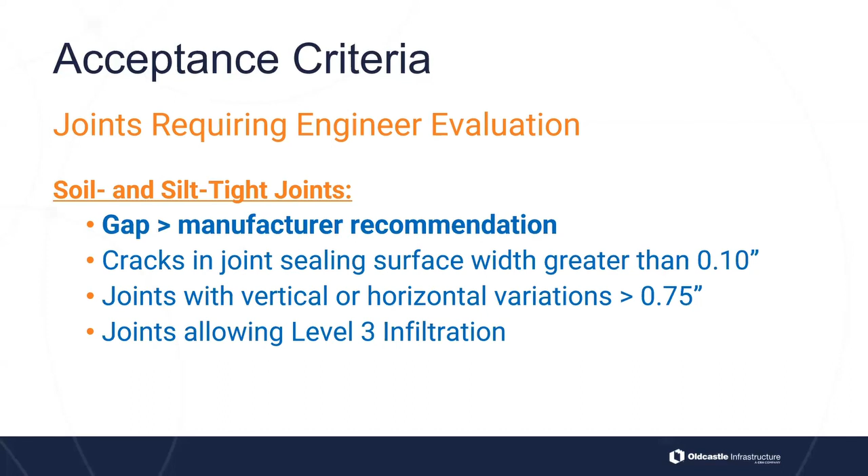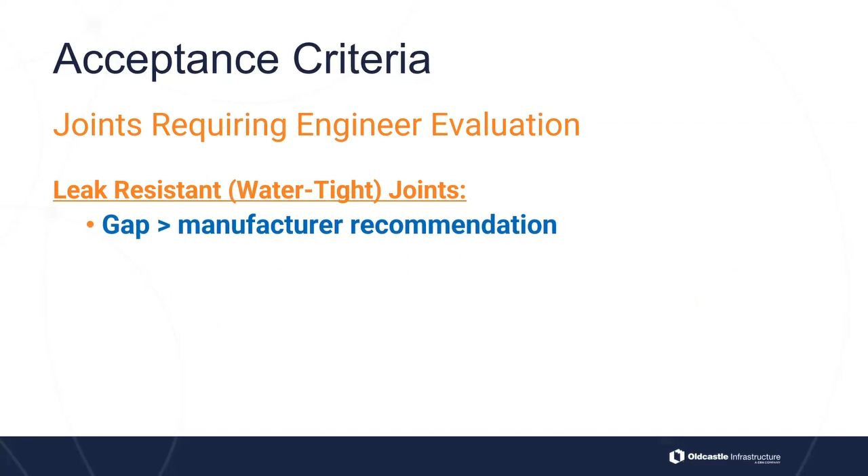For watertight or leak-resistant joints, again, if the gap is greater than the manufacturer recommendation, it has to be evaluated and looked at by an engineer. If there's any cracks in the joint sealing surface, so your bell or spigot, that are greater than 5/100ths of an inch for leak resistant, we need to make sure an engineer is looking at that.

Any joints with vertical or horizontal offsets or variations of greater than 3/4 of an inch, you've got to have an engineer look at it. Lastly, any joints with any exposed gasket or sealing material needs to be evaluated by an engineer. And joints allowing level 2 infiltration on a leak resistant or watertight joint need to be looked at by an engineer - we want to make sure if it's got that much water flowing into it, we've got an issue with that joint, and an engineer needs to look at it and make a recommendation for remediation.

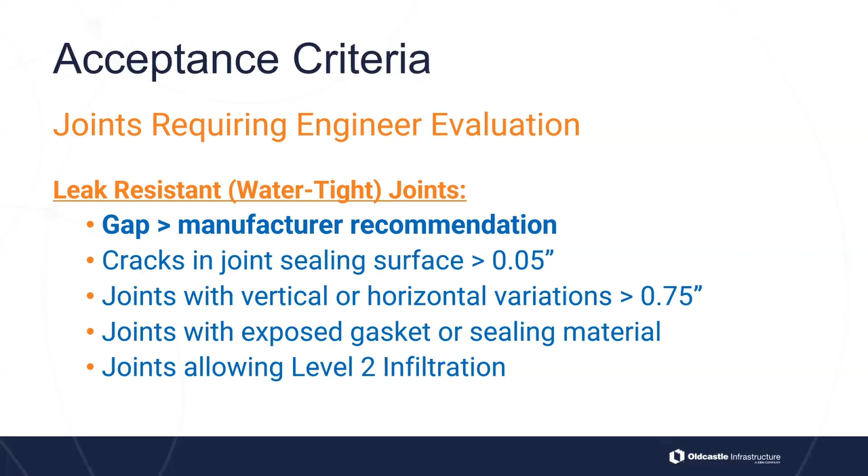ASTM C1840 also provides really great requirements for inspection report criteria for any post-installation inspection program. This is really important to consider when you're looking at your PII specs or any PII programs you have. Without a clear and concise requirement for a report format for the PII inspection deliverable, the engineer or the owner is just going to get a wide range of information and data that you have to sort through and try to interpret on your own.

The guidance given is for each of these pipes, and the NASSCO certification has great guidelines as well. But ASTM C1840 recommends providing a location, length, and width of all the cracks to the nearest 5/10ths of an inch for length and to the nearest 100th of an inch for width, if possible.

If you're using remote inspection and it's less than 5/100ths of an inch, note less than 5/100ths of an inch, because according to ASTM C1840, the acceptance criteria for a lot of it is if it's less than 5/100ths of an inch, it's going to be acceptable. So we want to make sure we're calling that out if it's less than 5/100ths of an inch.

Joint separation measurements, if it's in excess of 1 inch, they recommend you go to the nearest 10th of an inch. Any other notable observations like debris or obstructions, the recommendation is to provide a still image of each area that exceeds any acceptance criteria, and then reference each of those images back to the inspection video - whether that's at a location in the pipeline, the distance, or the time it shows up in the video.

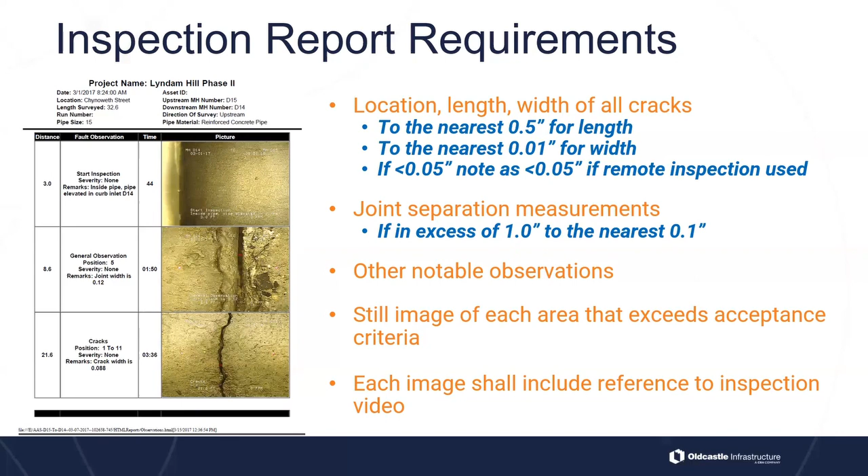So those are some great recommendations in ASTM C1840 for what you should be including in inspection reports. When I talk to engineers and inspectors, I always like to give them some recommendations to improve their post-installation inspection, and I always encourage them, number one, to adopt a PII program or post-installation inspection program.

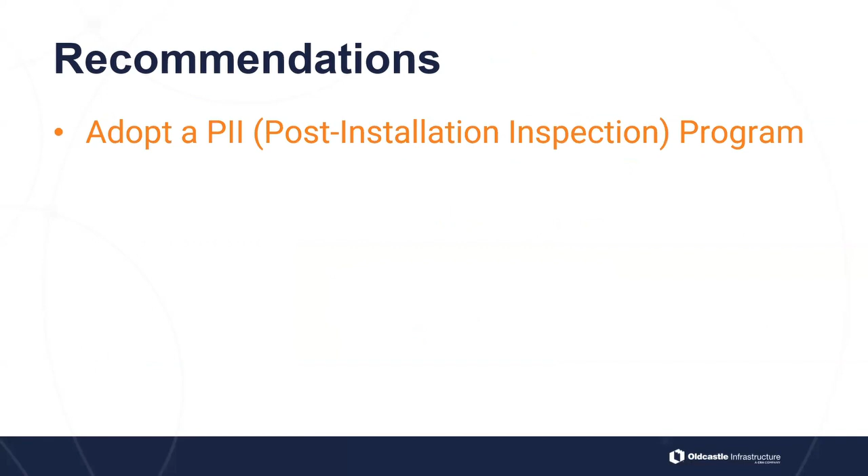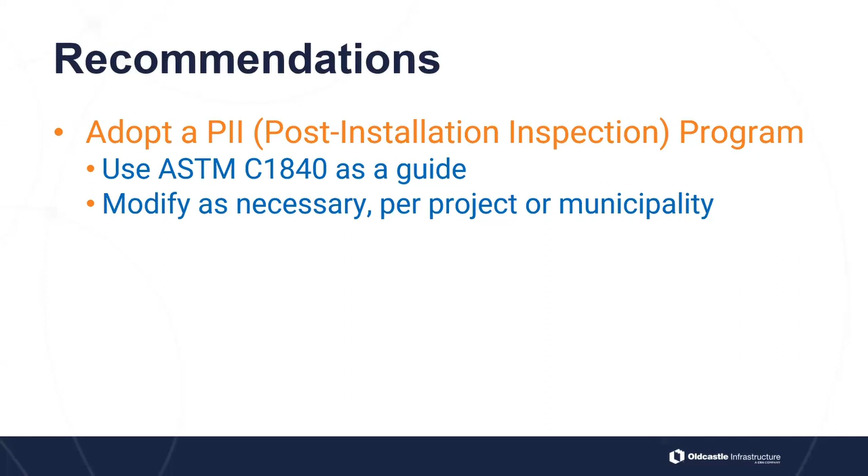I tell them that because we have this great spec - and I'm obviously a little partial because I helped write it - use ASTM C1840 as a guide, and then modify it if necessary per project or for your city, county, state, or whatever it is. Use this as a guide, and then if necessary, go ahead and modify it to meet your needs.

I also always recommend that we require NASSCO PACP certification for any operators performing the video inspections. But I also recommend to engineers and inspectors themselves to consider going through this NASSCO PACP certification program as well. I believe that having a robust PII specification and program in place is one of our best defenses against improper installation and can always help municipalities protect their infrastructure investments.